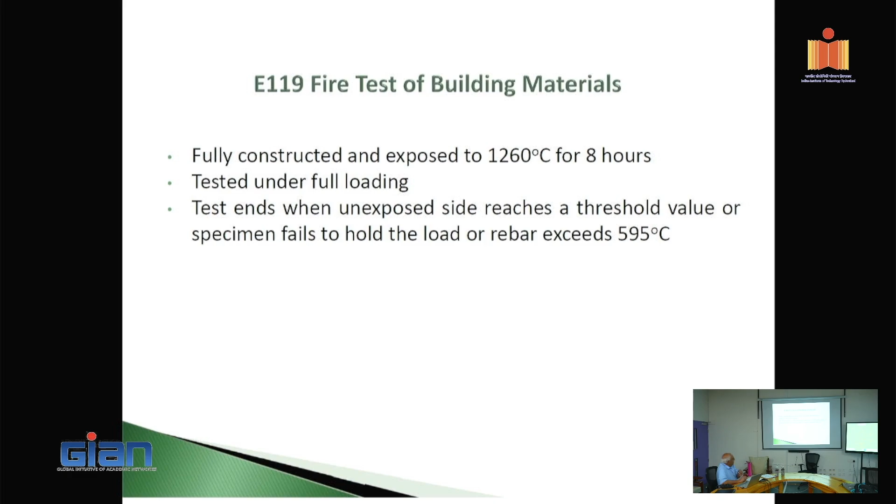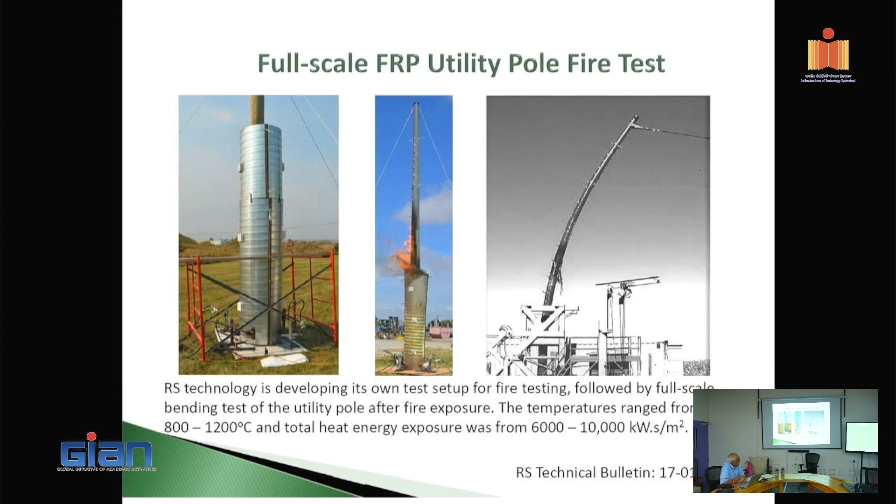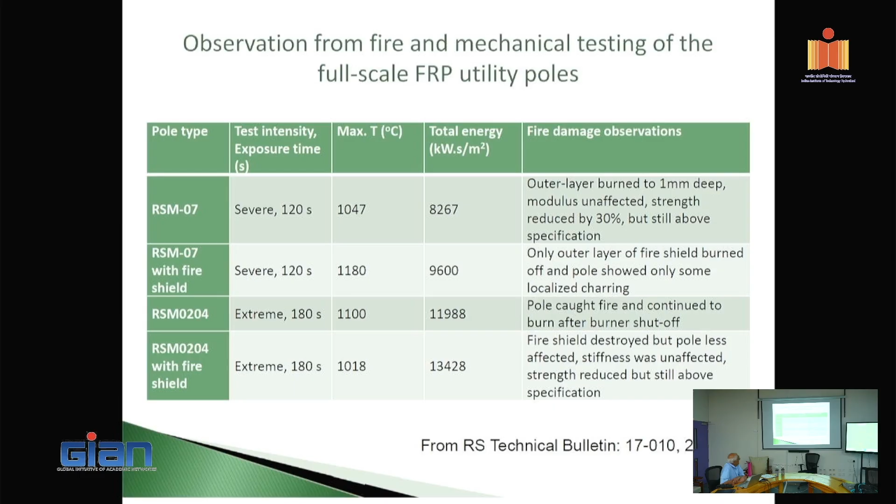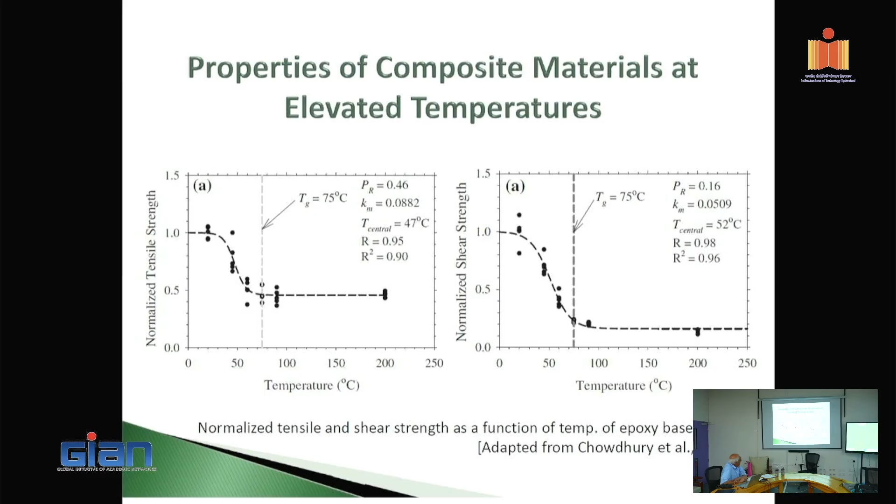So there are certain things about the fire shield, maximum temperatures. You remember the 1100 magic number I said? What is the energy that is put out? All that. Look at the TG value. We all keep talking about it, how the TG is going to dramatically drop. Look also, please, at the rough TG temperatures. They are around 80 degrees Celsius, somewhere around there.

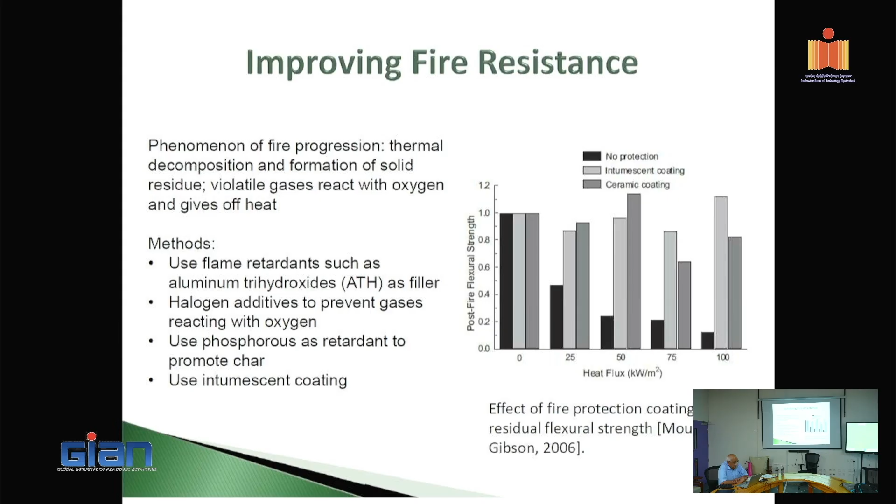How do you improve the fire resistance? What is the effect of fire protection coatings on the residual flexural strength? Use of flame retardants such as aluminum trihydroxide as a filler, halogen additives, use of phosphorus as a retardant, and intumescent coating. The first three are additives in a resin. The last one is external coating. On top of it, we have a fire shield. So there are three different ways we want to protect.

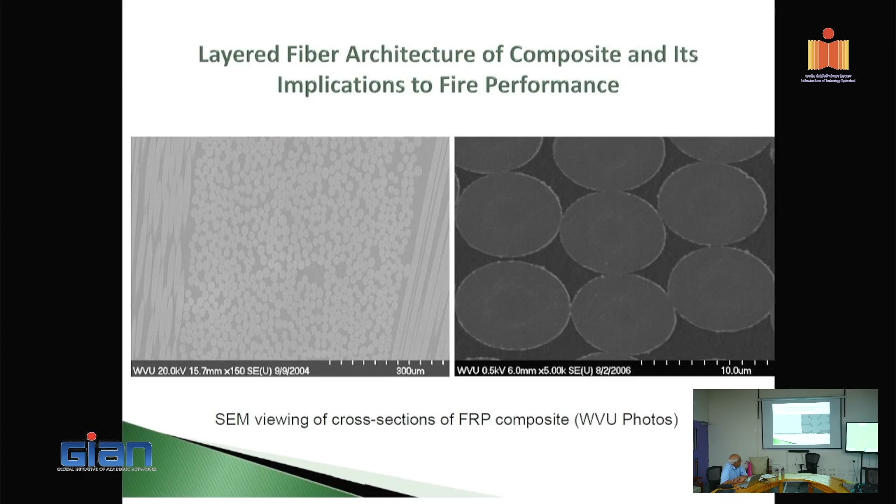This is the SEM view, layered fiber architecture of a composite. And let's look at the implications of it before and after fire. Obviously, that's before the fire. And as you can see, this is one layer, laminate type thing, if you want to call it. This is another laminate type thing. So you have this alternately. That is the cross section under SEM.

So we torched it. So if you are mixing this type of fire-resistant material to enhance its capacity, it may have some side effects. They are causing voids or something, this chemical. Definitely, you lose some strength. There's no question about it. We know that. So instead of having your 0.01, we need to reduce that to 0.008. Something like that. This is the compromise you have to make when you're doing a design.

See, we recognize that, and that's my technician there. Wonderful technician. I lost him because he retired, but wonderful guy.

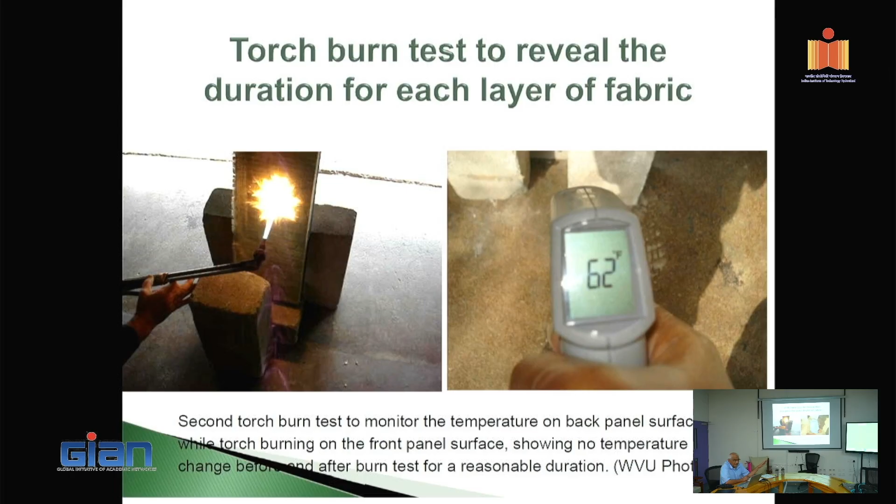Incidentally, I didn't say it. This particular one we had to test for the destroyer class of ships, where our role was to build the deck house, the top part of it, and keep it lightweight.

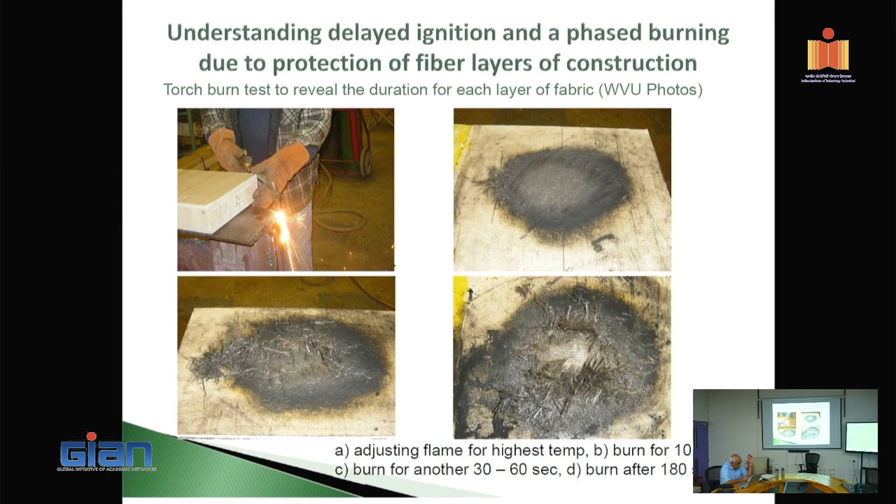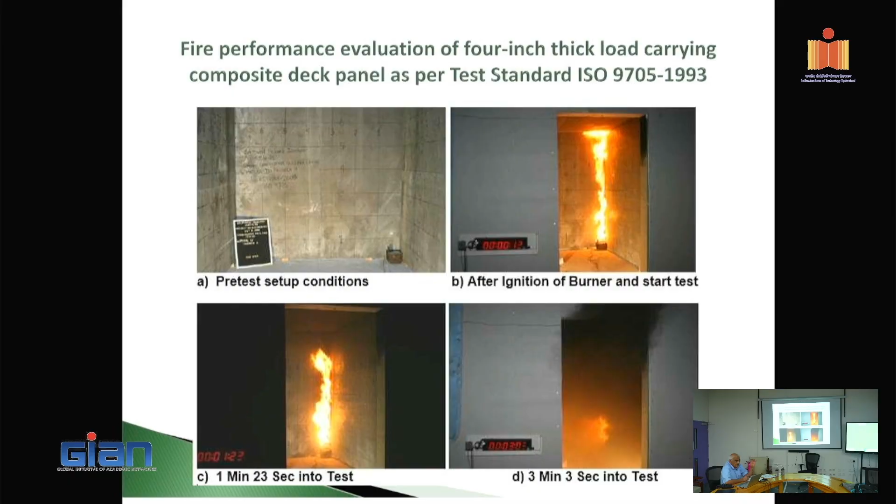This is a corner test, I told you, E119 type test. And again, we tested real fire, 10 feet by 10 feet by 10 feet, and it has to survive a minimum of 3 minutes. A minimum. And we have to worry about smoke, toxicity, and those kinds of things. As the fire goes on, these are the chemicals released. We want to make sure that they are within the parameters that do not create a carcinogenic effect.

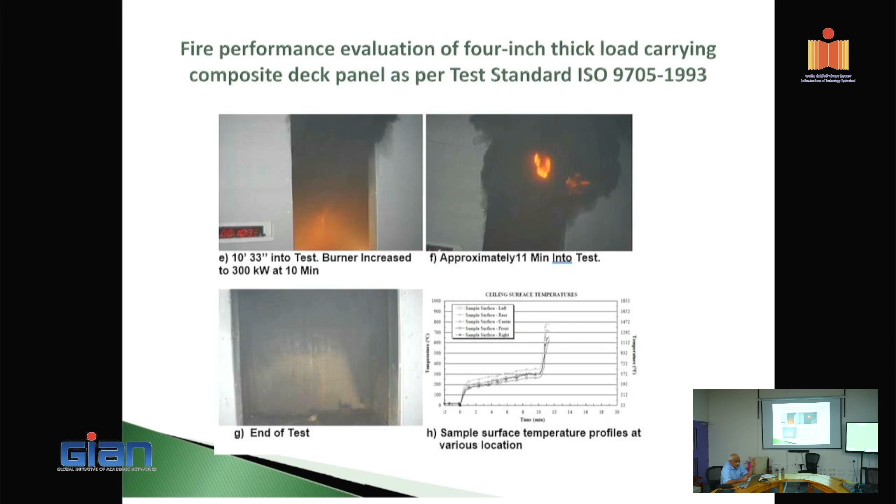So, fire performance evaluation of a 4-inch thick load carrying composite deck panel. Somebody built a local school. I volunteered to provide my panels, and before I provided them, they wanted me to test for fire, and that's what we did. And again, we satisfied the requirements. This is a prefab composite panel that satisfied the requirement. Again, the very important tests when it comes to fire are two, E84 and E119. This is E119.

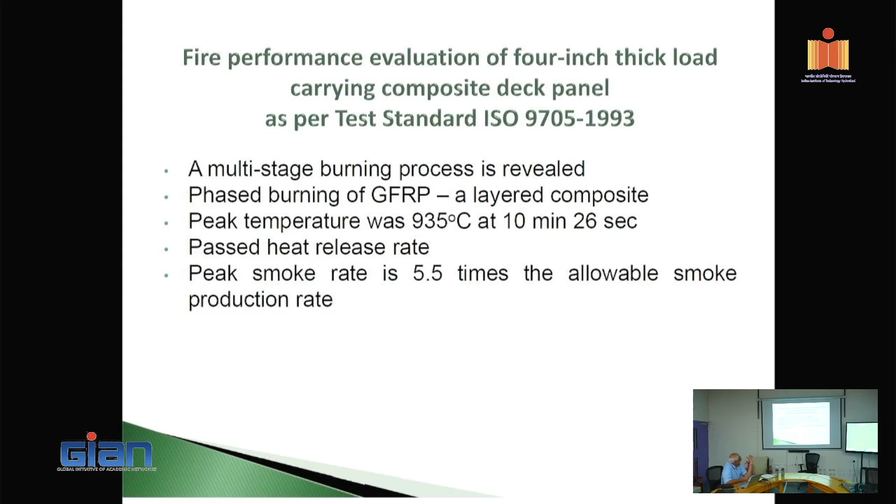Of course, we have other things like opacity and the visual thing and what have you. Those can be exempt, but the two are E84 and E119. Fire performance evaluation of a 4-inch thick load carrying... yeah, I just talked about it. I won't go into a lot of details, but

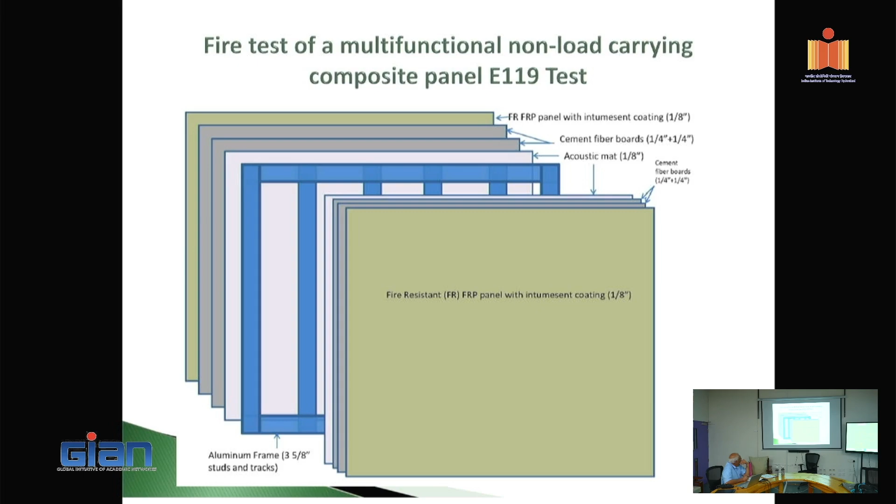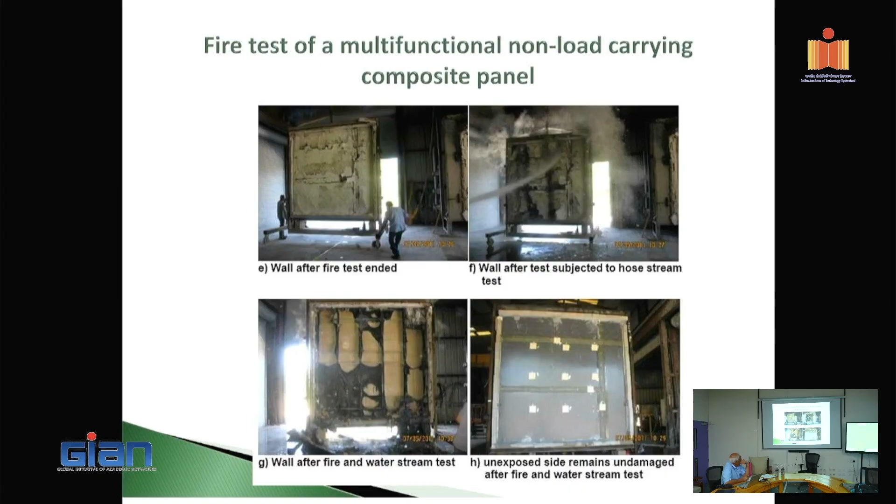so this is the wall that we have installed in the school. This is the E119. That's our panel that we tested. So we developed a multifunctional non-load carrying, non-load bearing panel.

So the ignition time is 70 seconds. No visibility, the opacity I was talking about, is 160 seconds only, that's almost 3 minutes. After that, you cannot see. So up to 160 seconds, you can see and get out. A lot of people don't know it: in fire, the deaths are not due to heat, but due to toxicity.

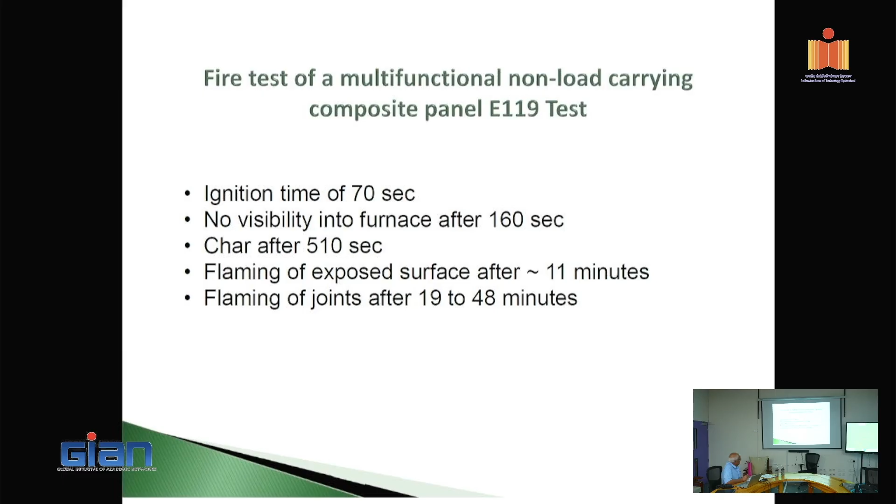So various flame of exposed surface. After 11 minutes, there is a standard for it under the E119, flame of joints. That's a critical one. So they have standardized that stuff. So implications of the above test for the utility poles is fire performance can be enhanced using the coatings. Phased flame burn occurs due to intumescent coating and layered fiber construction. That's what I told you, 40 layers of fiber delays it up to 30 minutes.

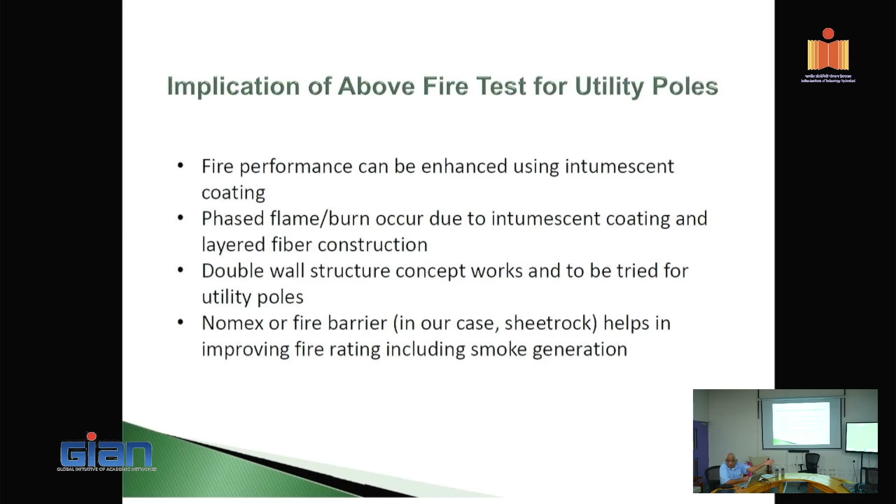Typically, the fire ratings are based on half-hour rating, 1 hour rating, and that rating in concrete buildings depends on the clear cover, like a half-inch cover is 15 minutes, 1-inch cover is half hour, 2-inch cover is 2 hours, things like that. That's what we are talking about. What is fire rating? Fire rating. Yeah, that would tremendously enhance. Again, what is it?

Think of it like this: some kind of a Band-Aid. You know what a Band-Aid is, right? So we wrap around it. That's a barrier. It gets burnt but protects the inner core. It won't be easy to get it burned. It'll take a while before it burns. So, in other words, it's not like paper that burns. You have to have a sustained fire before it burns. Okay.

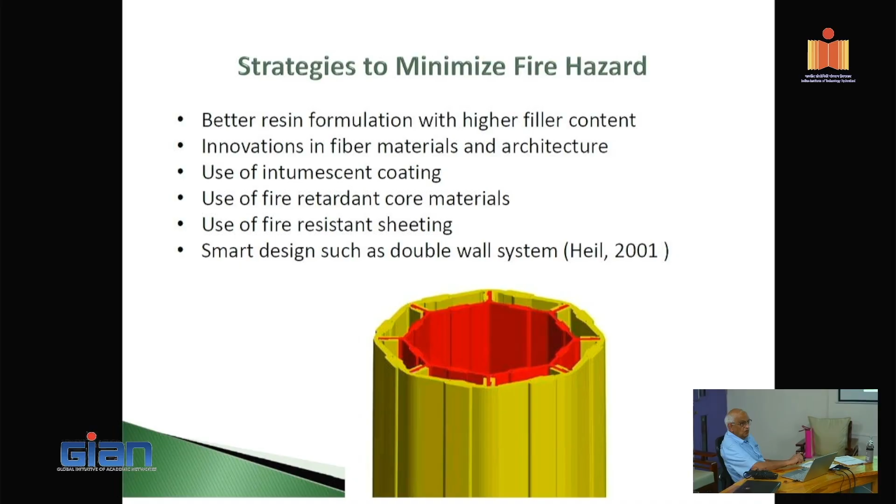This is a double wall pole. I won't go there. In conclusion, this study has identified FRP burning as a phased process due to layered fiber construction, even without intumescent coatings. This multi-stage burning process appears unique in the fire behavior. Utility poles are able to survive general fires, and this will help the utility industry to use the FRP poles.

Sir, what is the cross section of that utility pole? Is it hollow? It is hollow. I have several cross sections depending on the length of the cantilever pole you want. They are 12 inches, 16 inches, 18 inches and 24 inches. Typically, the thickness for lower poles is about ½ inch. For higher diameters, it is about 3/4 inch. And it is also layered? Oh yeah, all are layered. As the thickness increases, the number of layers increases.

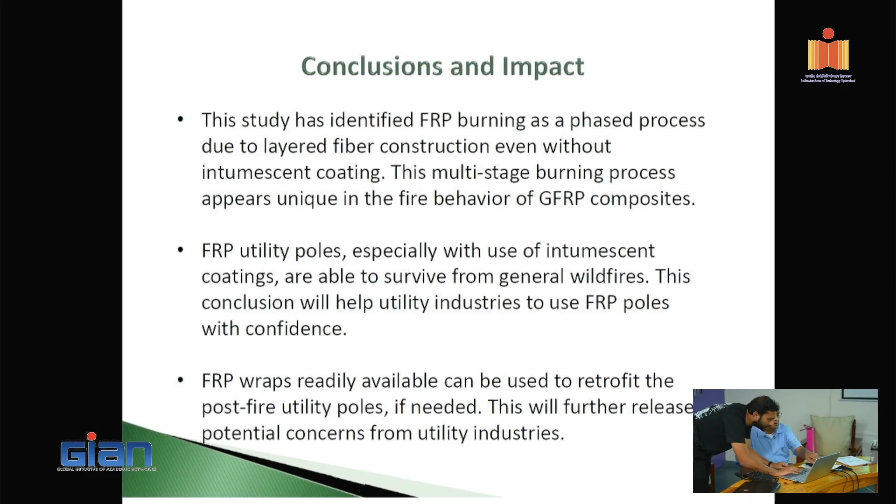This is kind of my passion. The reason I say it's my passion is I just told you I am able to develop modified wood of a higher grade, and some industry people want to come talk about it. This is what I told them: if you are not thinking in the future about how to utilize modified wood for housing, please don't waste your time. They're going to see me on September 15th and 16th. It's a great passion for me.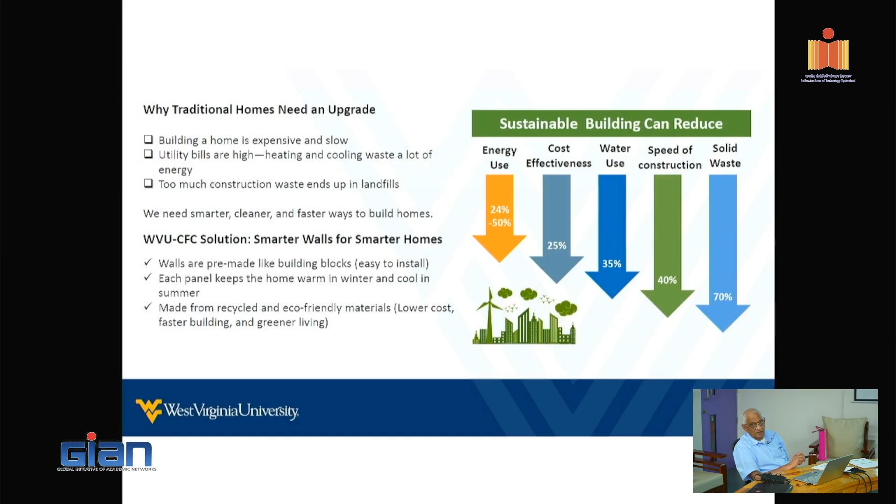So these are sustainable buildings we are talking about, right? I won't go into a lot of details, I'll just pass through. This is the FRP modular building.

That is my natural fiber panels I generated. So what I'm saying is we are talking about green composites for energy efficient buildings. There's only one of 8 points, or in this case I only showed 6 points, that we need to be worrying about in terms of efficient housing. One of the 8 or 6 points is the material, it's only one. There are many other issues we need to bring in to make it more energy efficient.

I'm going to talk briefly, breeze through some of the aspects, I won't delve into it, each issue is a big topic by itself. The first one is you want a durable, strong, stiff composite panel made of natural fibers and natural resins with 10 times lower embodied energy.

That's the first one. The second is modular panels with a built-in trombe wall concept, a special wall for heating and cooling. All that means is you're going to draw geothermal energy, not by a pump, but by a convection principle. Anyway, I'll leave it there, but that's another one.

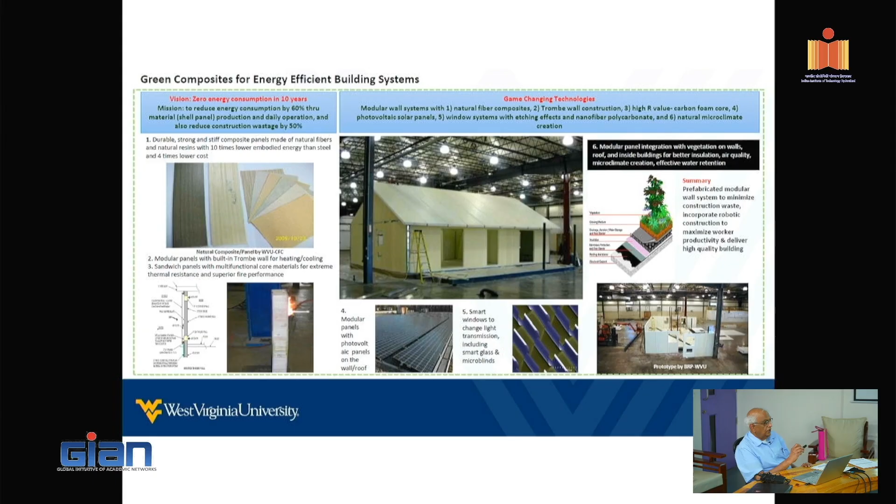What that implies is you can get a window pane, especially for India, angled in a manner to send only the cooler part of the spectrum and reflect out the warmer part. That's the principle. Anyway, that's another one. So then, a roof garden, is it? Yes, so these are the ones we incorporated. All right, sir, won't the roof garden make the fiber damp?

You see, we have special plastic fabrics that would not let water go down. On the other hand, do you know water is the best insulator? You can't get any better insulator than water. So any dampness is going to be shut off.

And do you know that 30 to 35% of heating or cooling requirement is because of the roof? 30%, think about it. So if I can control the temperature, I'm saving not 30% because of other losses. And even if I save 20%, that's a lot of saving, right?

That is the thing. So same thing with human beings. They lose a lot of heat in winter from the head. That's why everybody wants to cover their head, without realizing why they're doing it, but it looks good, sounds good, saves good. So therefore I do it. That's what it is.

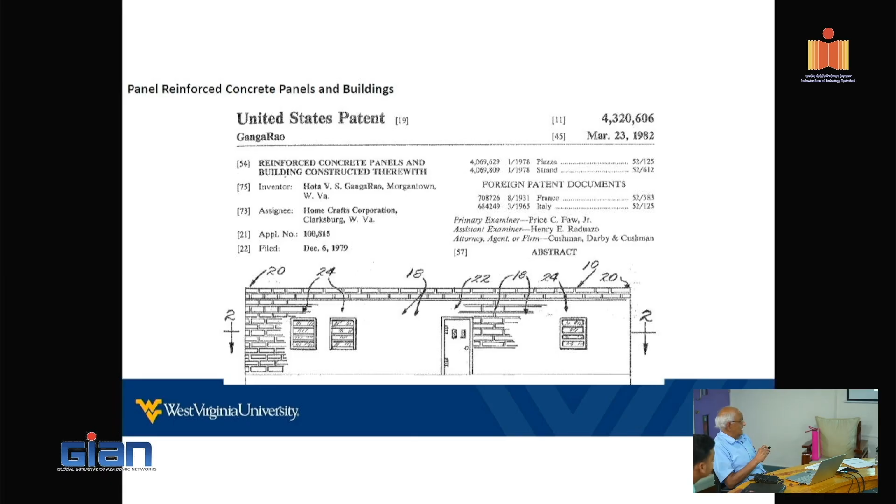Okay, sorry. So here is the modular concept. I got a patent back in '79. I won't go into detail, but that's the modular concept.

And the beauty of it is, here are the modular pieces. These come up with various prefab functionalities, like you have conduits, for example, you have connector details, another example, you have joints in a manner that would transfer the shear forces, all that good stuff. And the windows and doors fit because you just shovel it in.

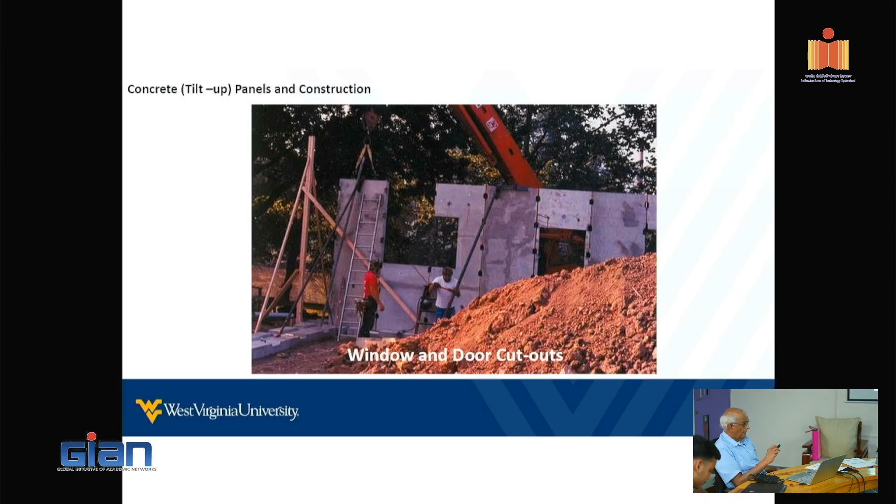So you can see how I can control even the colors. So I can get a variety of colors. And here is the foam core.

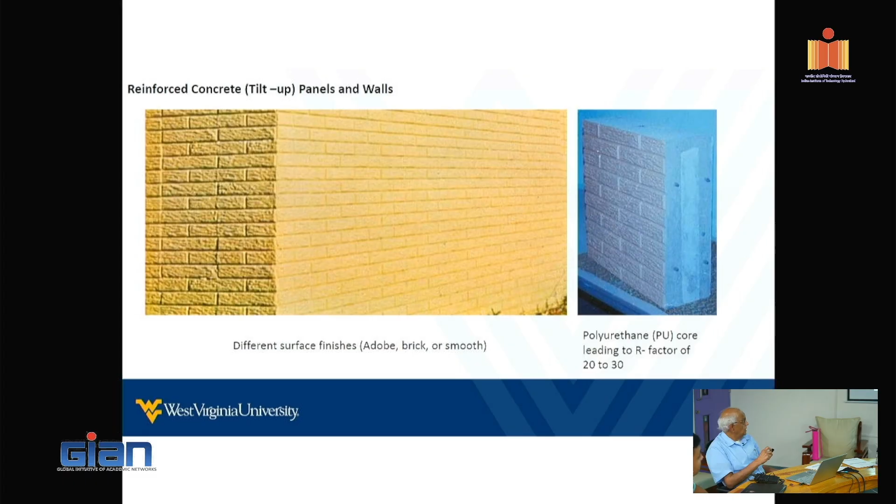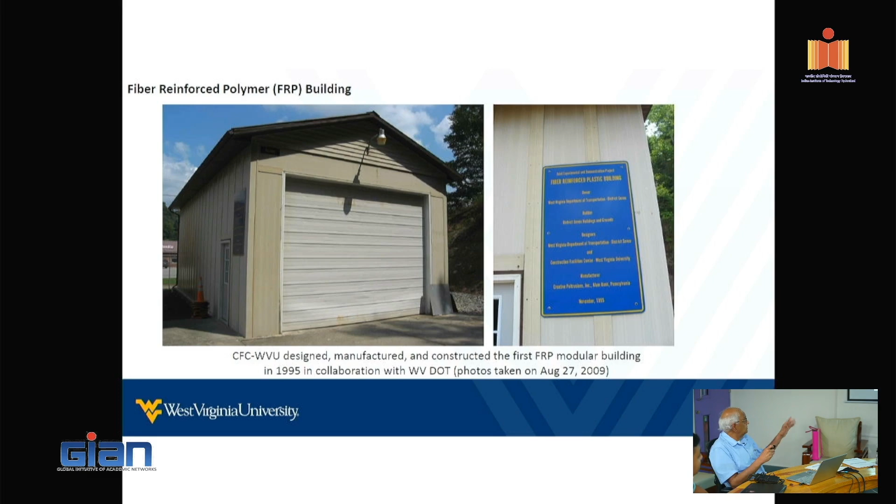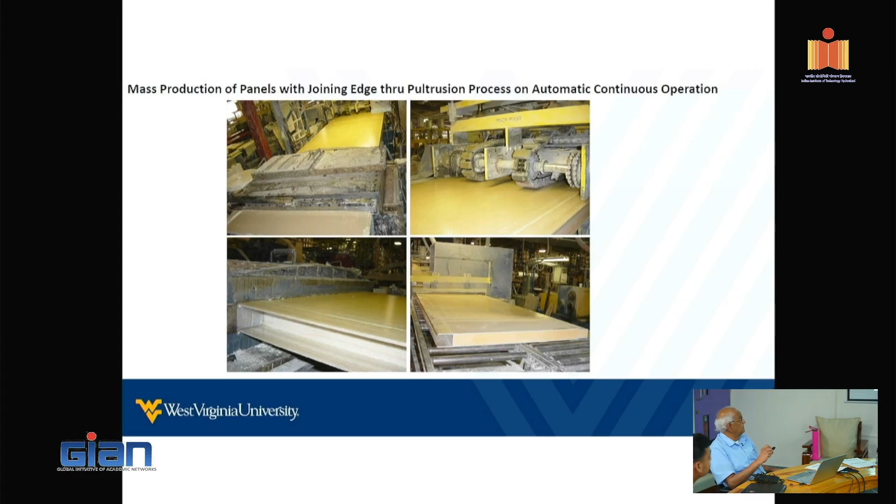Here is a building we built in 1995. Looks exactly like that today. Here is a pultrusion process with foam. This is a polyurethane foam core. You can have many different foam cores, but this is one of the many. That is how we built that building.

That's the pultrusion process, on the natural composite. Yeah, and now we can think in terms of having these openings. That's what we are doing now. And this is the carbon foam, low-grade carbon foam panel.

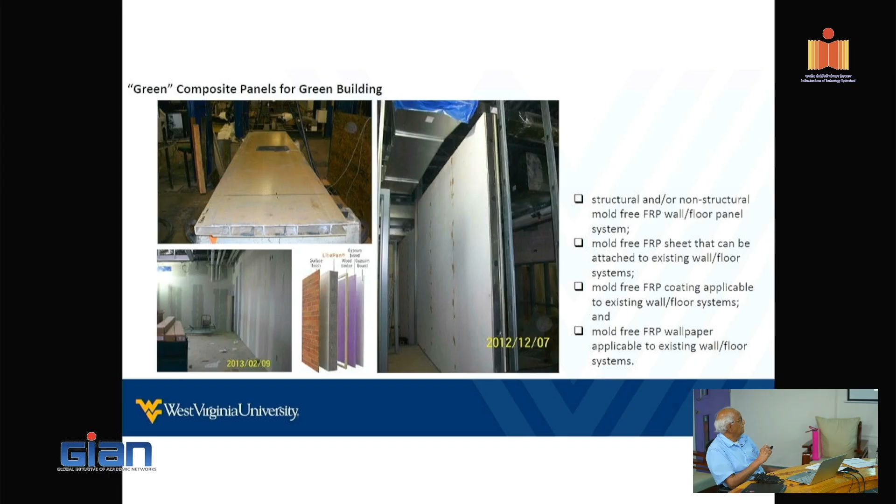Intertech is the one that's helping us do all this work. We did some work on rammed earth. This is only good for rural areas, not for urban areas. I built a building in Alaska, and there was about a 7.2 earthquake, about 50 miles from the epicenter, and it survived.

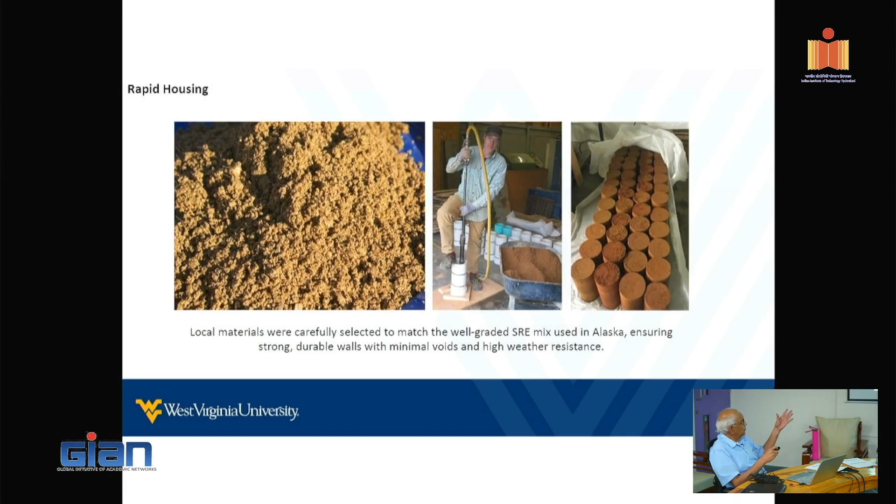That is the Alaska building. How you do the rammed earth, I won't go there, but the message is, it is so extraordinarily heat resistant. That is the message, or cold resistant, whichever way you call it.

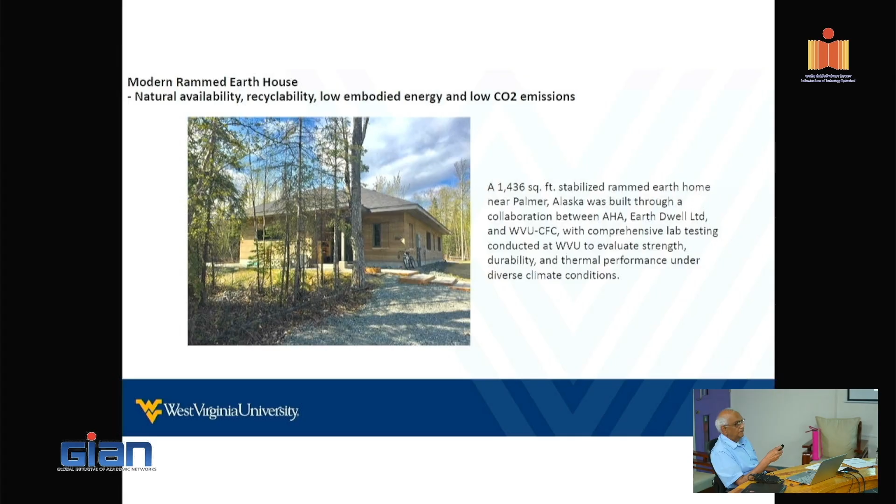These are some of the details about that. It looks good. It's not an inexpensive thing, I admit, not for everybody. It's only for rural communities where you use the local material. That's the word. So the foundation is a concrete...

No, it's all rammed earth. It's all rammed earth. We learned this from the Chinese.

There are rammed earth buildings even in India, but that's only in the Kashmir, Nepal region, and they call them tulos. I visited one of the tulos that was built around the year 620 or 621. A functional tulo. Is there any damp-proofing for this basement?

Yes, they do have that. Yeah, that's very important, very important. Or else you get the mold problem. There's a beauty with the composite. Composite never builds up mold.

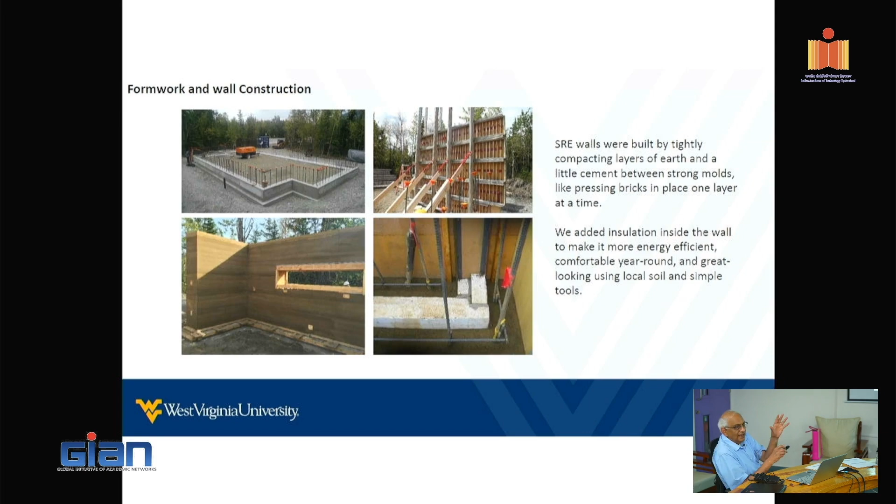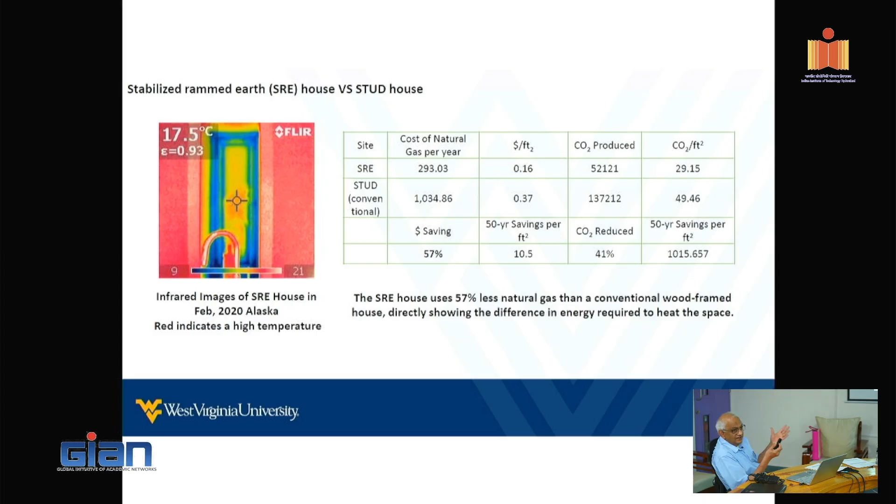That's a different topic. I did some work in that area. Okay, I won't go there. These are all different. We always, as much as possible with the money given, do post evaluations of these structures because they're all different concepts. We don't know what's happening. I can sit here and talk, but the proof of the pudding is how it is doing in the field, you know.

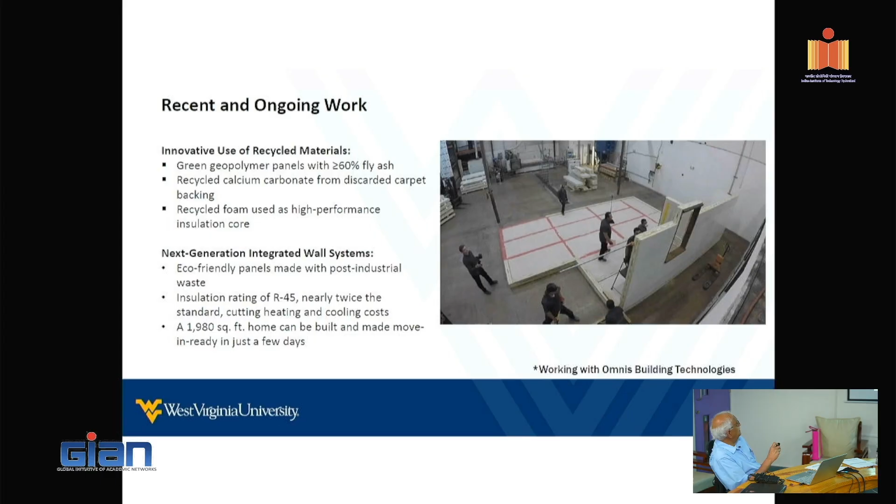That's right. So we are now working on geopolymer buildings. I just got some funding to do that, and that is the building we are going to build a few miles from my office, and we are going to let needy people occupy it and then test it for a variety of things. This is just one of the several tests we are conducting. That's a geopolymer panel. That's the point. Geopolymer panel. That's the building.

But with that, you're also generating a lot of waste, a lot of recycling needs. So we are working on carpet recycling. We recovered the calcium carbonate, which is the backing material of the carpet, and we are reusing that recovered material in a pultrusion process. We got as good results as virgin calcium carbonate.

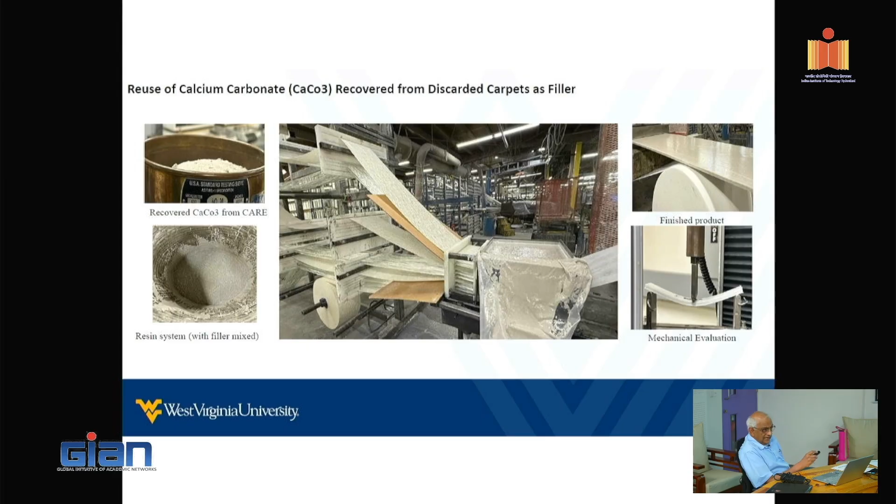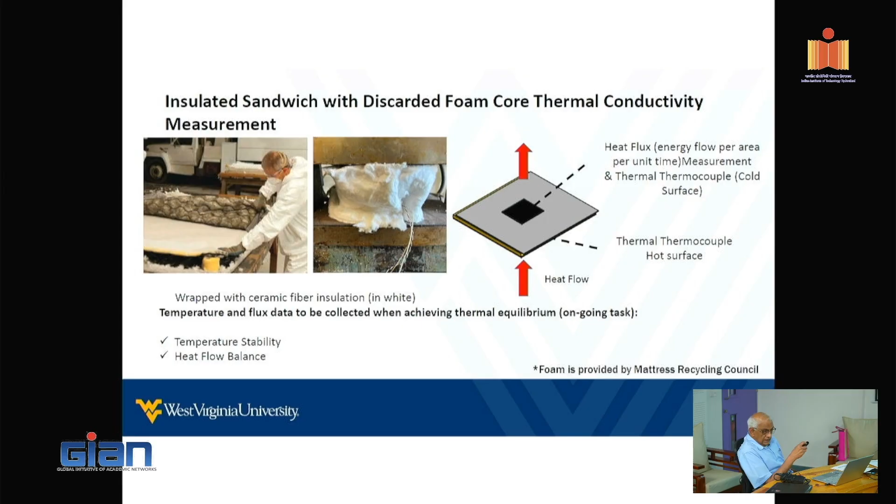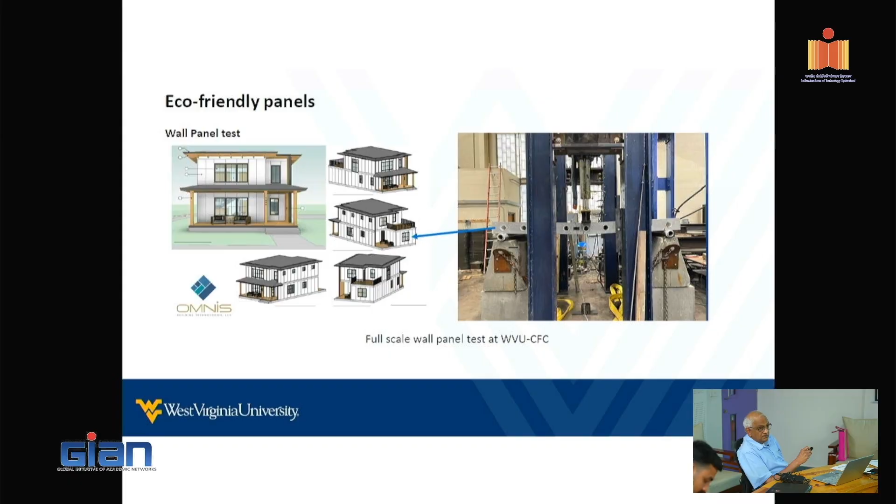This is the insulated sandwich panel with the discarded foam core. So where is the foam coming from? Discarded mattresses. We discard 14 million mattresses every year in the US. Where would we bury it? So that's what we are doing. We conduct thermal conductivity tests all along, and we put that in the wall floor panel that I showed you in my earlier slide. So the foam in here is that discarded mattress. That is the location where we are building.

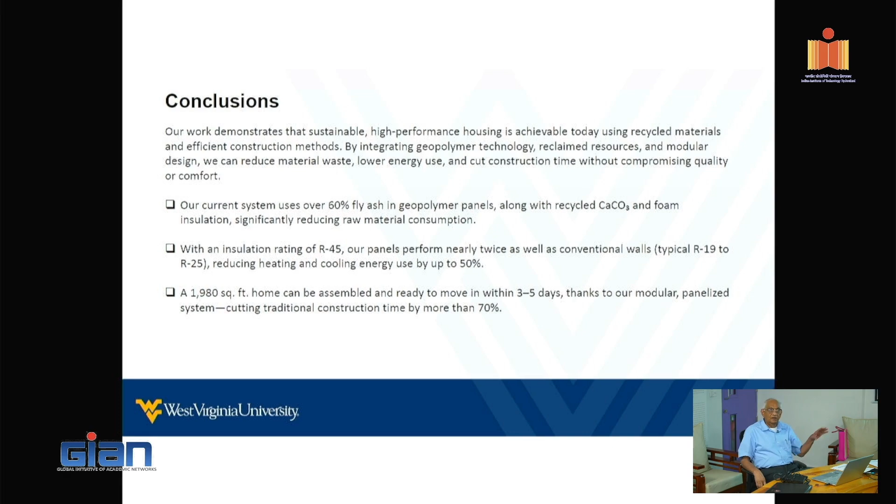Oh, those are the conclusions. That concludes my presentation. A broad brush presentation, a lot of detail. Many PhDs work on these kinds of things, so there's a lot of theory behind it. I just showed what appeals to people, not the theoretical part. That doesn't appeal to people; that's a big drag on people's time and effort.

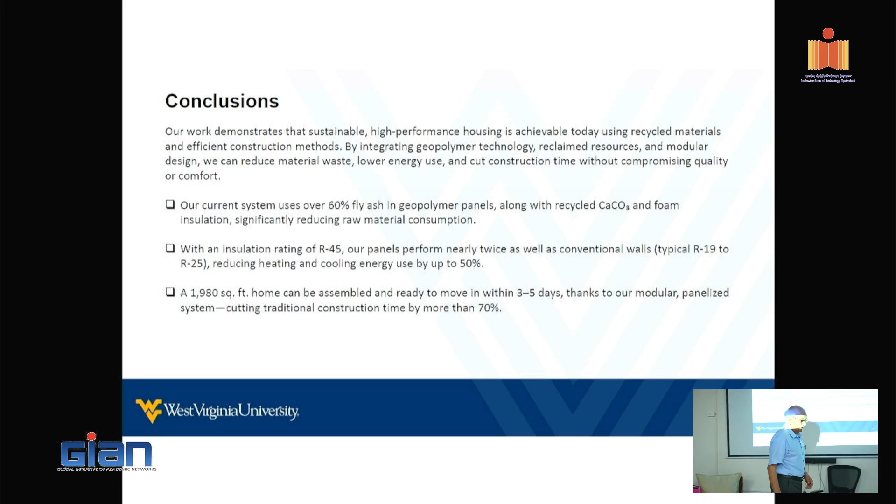So have you worked with thermoplastics in this foam? Have I worked with thermoplastics, like PE, polyethylene? Oh yeah, we did. Using the PE, yeah, we did.

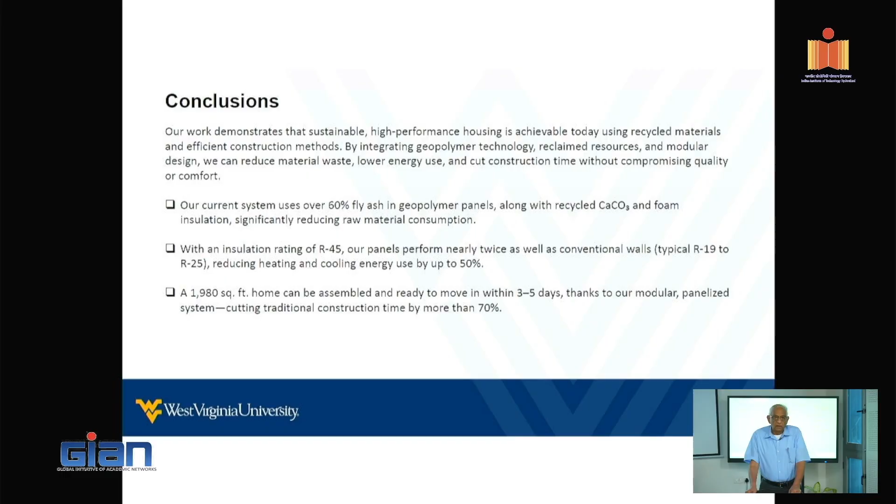In the US, we discard 20 million railroad ties. What I suggested was, instead of trying to bury that in the landfill, we take the beat up tie - 20 million a year, mind you - wrap it with a fabric, and then, since all the thermoplastics are recyclable, we recycled it and installed it. I don't have that presentation here, but yes.

So, of course, you have to characterize all these things. These are not simple and easy; it's a lot of work. A lot of preliminary work on how you characterize, how you're going to manufacture, and all that, but we did. And that's where we have applied it.

I don't know how much you know, but about 75 to 80% of our plastic consumption is thermoplastics. Only 25% is thermoset. And thermoplastics are highly amenable for recycling. We wrapped the old tie and then heated the thermoplastic like a bread dough, and then we poured it in, and that's what we did.